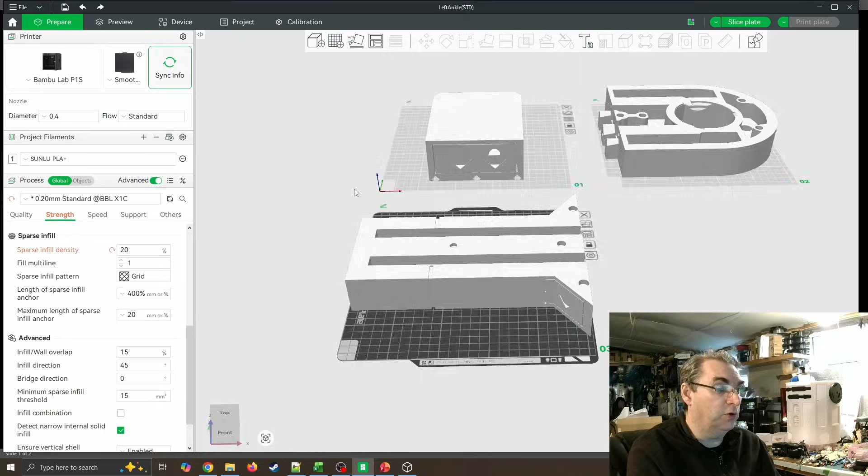Quick important reminder, there's no need for supports with any of this stuff. If you do click supports, it will put supports down the entire length of these holes, and that's where the metal rods are going to go. So again, no supports needed. It's already got integrated supports like here, which we cut out, and you'll see that in a moment.

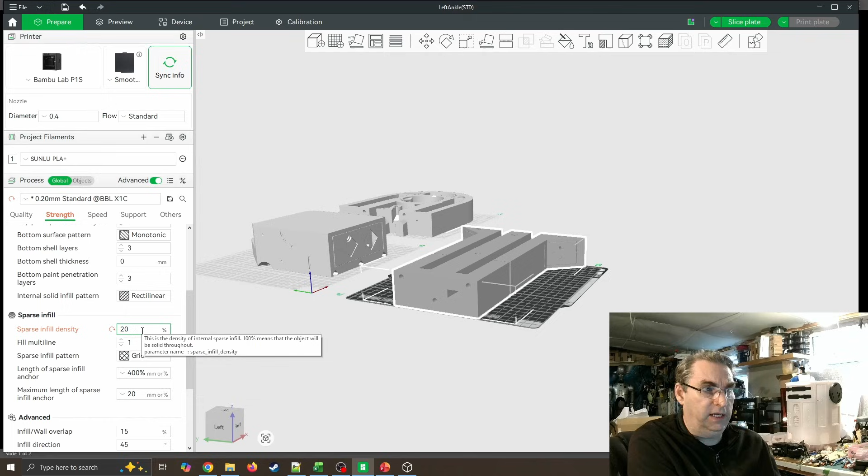Okay, quick word on quality and strength. I've used 4 walls and 20% infill. Again, time will tell if these settings are all right. Hopefully in about a month's time we'll be driving it around at conventions, so we'll know whether it was strong enough. I've already printed these, so let's go back a few days to see me actually assembling one of the legs.

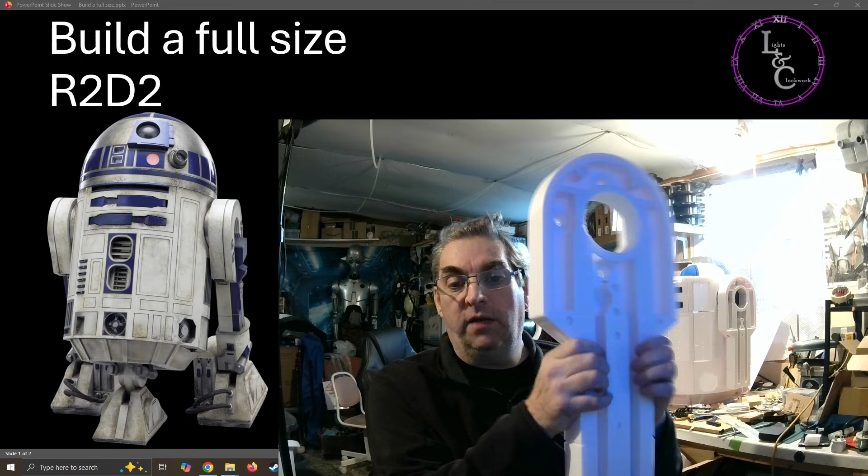Hello, it's December 26th. I'm going to spend a few minutes and try to get a bit of work done on the legs. So I've already made a bit of a mistake - I've trial fitted the legs and now I can't get them apart to actually apply the glue. So I shall worry about that in a little while.

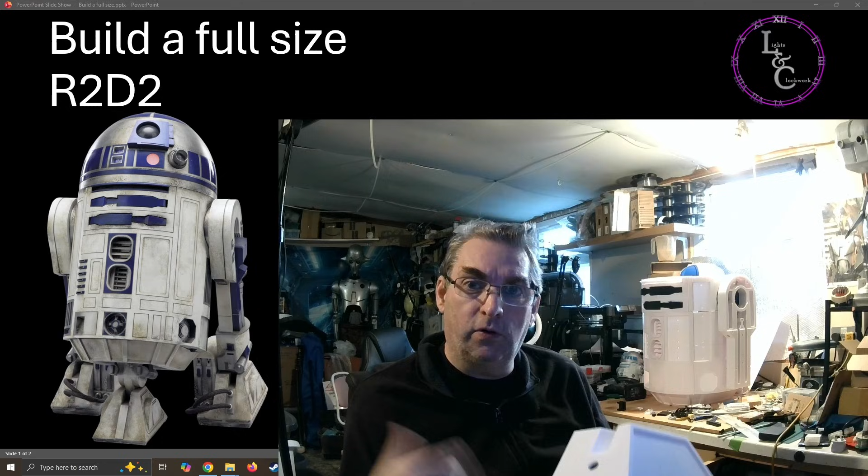Over the past few days I have been printing the foot shells, so I've got both left and right sides done now, and I think most of the fixtures and fittings for the ankles are done too - centre, left and right. But my next task is you need 6 pieces of 6mm threaded rod.

So I've already got some metre-long pieces that I've got in stock from a previous project. I've already marked them off with a bit of masking tape. Now the right thing to do now would be to get a vise and a hacksaw, but I'm not going to do that. I'm going to use an angle grinder because it's a little bit quicker, but it's easier on the arm. Plus I've got no new blades. I've got my goggles on standby because it can be quite dangerous. So I'm going to cut these together and then we'll try to start sliding these legs together.

Okay, so that's these cut down. I'm glad I was wearing the goggles because I definitely felt some of the sparks hit me in the face. So one thing I do when I've angle ground a bolt down is put a quick test nut on and just make sure that it does actually come on and off.

If not, it's time to get the tap and die set out and recut the thread, or get a file and just take the edge off a little bit. But that one seems fine. So one down, a few more to go. Okay, so this one didn't quite work very well, so I just take a file to it, file down the edge a little bit, and now it's gone on just fine.

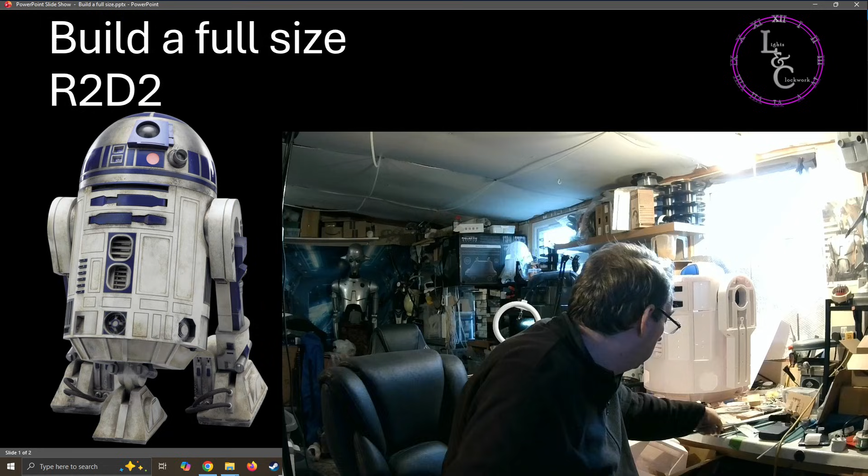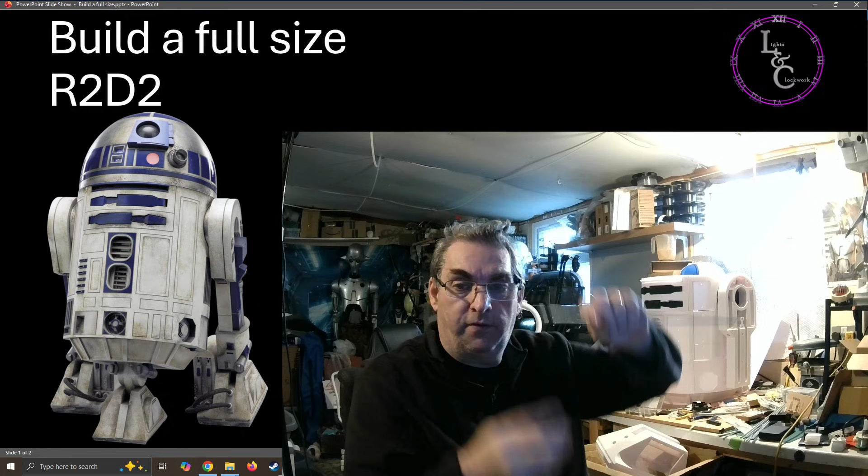There we go, so that's all of them now done, ready for threaded nuts in the legs. Okay, so we'll try and take these apart.

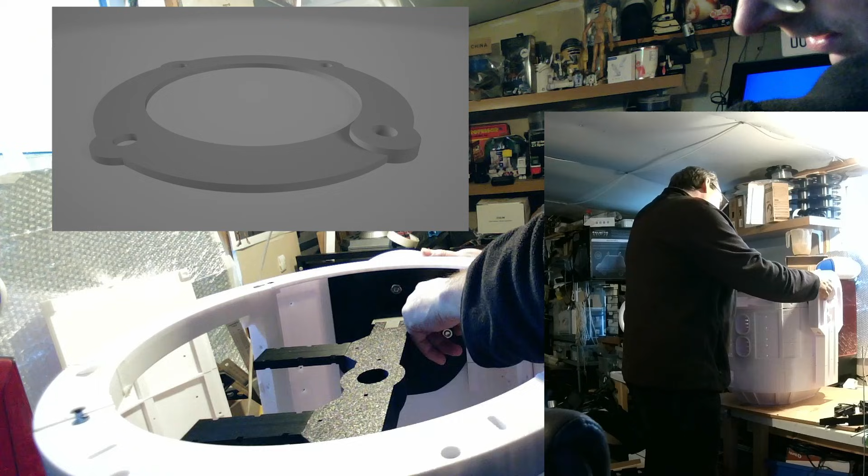Okay, so if you're wondering how the manual method works on this one - because I did the manual method on the Mark III - this is a slightly different mechanism, but it's quite straightforward. I've been playing about with it. So you've got the 4 bolts, although I've only got 3 on right now, and all you've got to do is loosen them off a little bit, and then there's a slightly reinforced, slightly inset bit, you can just pop that out. Oops.

Not really, so undo it a bit more. Just undo that a bit more. This comes out very slightly, so it comes out a little bit. Then you can just sort of move that down, so you can kind of see it. That then pushes back in. Tighten your nuts up, and your leg's now in the position it should be for the 3-legged mode.

To come back, same thing again. Just loosen them off a little bit. Put that back out, comes back up, clicks back in. Tighten it back up, and you're in 2-legged mode. Obviously do that on each side, but it should be, and hopefully fairly straightforward and strong.

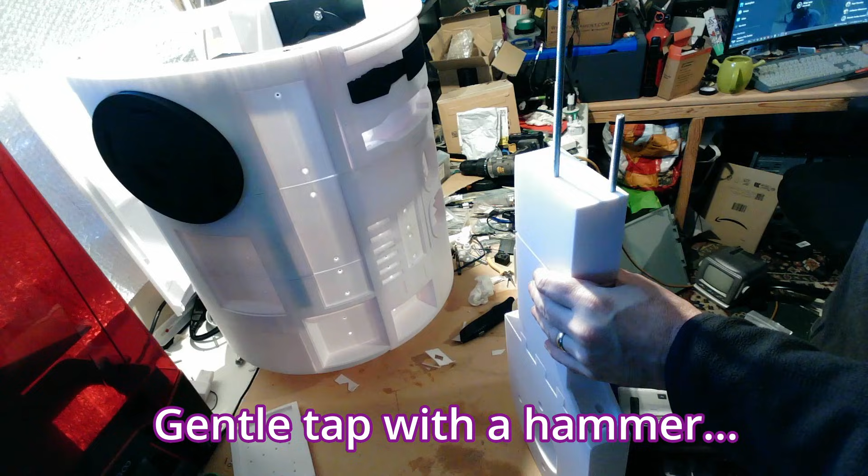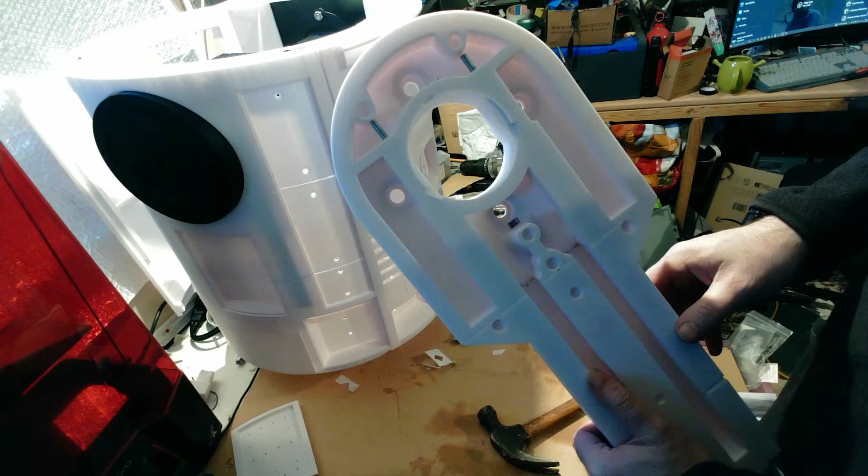Okay, so the 3 bolts are now in. I've had to tap them through a little bit, but it should be strong enough.

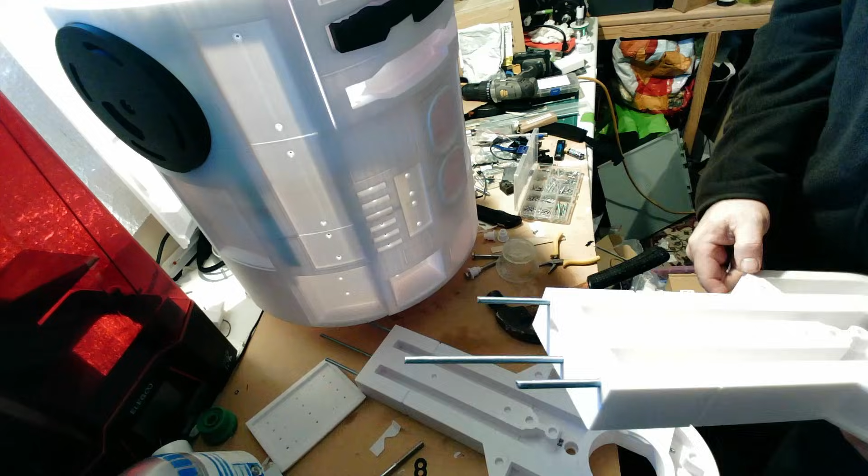Okay, with a bit of brute force, got the threaded bolts in. Whether they'll come back out or not, I don't know. You're supposed to take 2 out to put into the ankles, but I'm going to leave them set for now, and I shall come back to that in a little while.

Okay, so that's the legs now. Got the metal bars in, all the glue's all set. I've got the ankle, more on that in a little while.

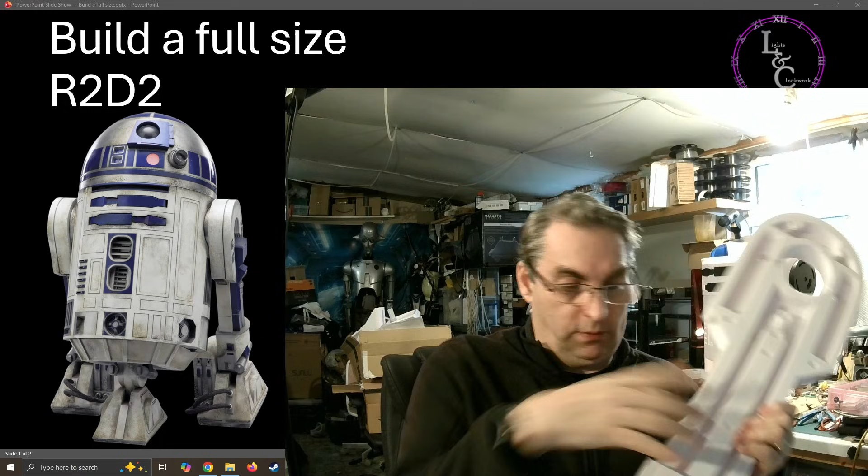You can at this point just do a test fit if you're feeling brave. There we go, that's now in. You should glue the ankle in, but I'm not going to for a while because I do want to spray paint all this and attach some of the other greeblers and things. But I'm fairly confident the threaded rod will be strong enough for just some test runs around the house.

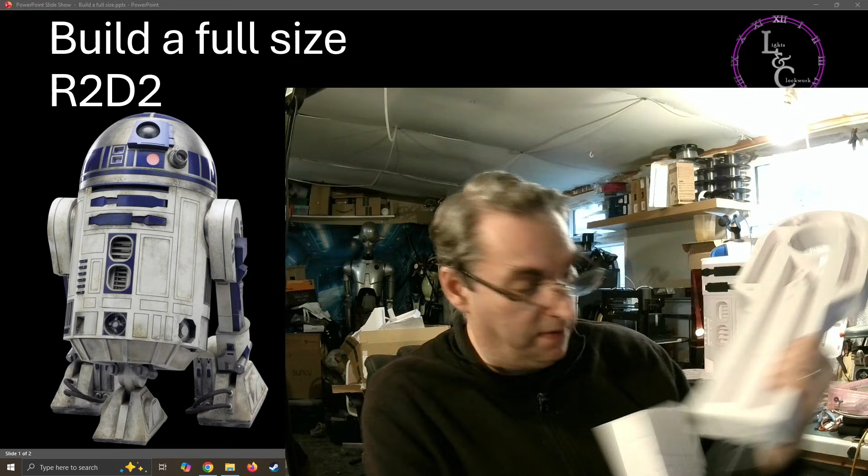Now it does require 2 square nuts to go into this side. So in a moment I'm going to take the bars back out, put the 2 outer ones in, fasten them into the square nuts, and then the centre bar, again that's just going to slide out. You put a square nut in this side, this bit, for that to attach in. So the centre bar is attached at the top end, and the 2 outer ones are attached in the lower part of the ankle. And then some more nuts go on the top to hold it all in place.

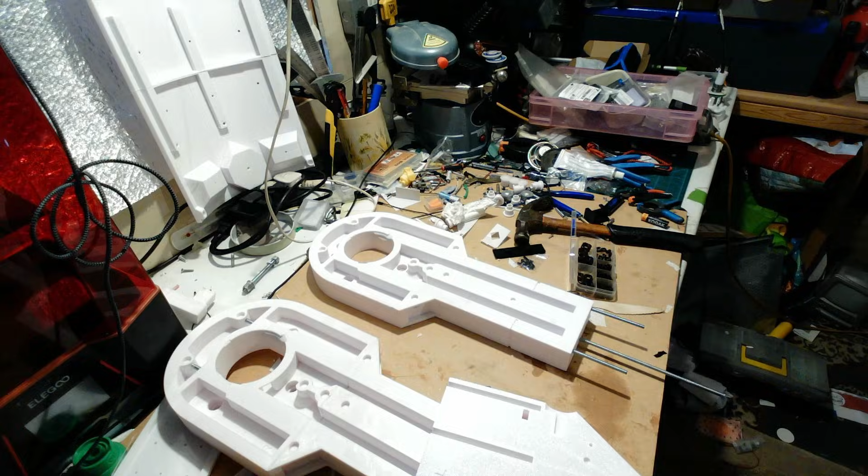Okay, so I'm on the left leg. It says so, it's got the L's on it. I'm just going to take out these 2 bars, just going to slide them in. You can see this sort of go all the way through. What I'm going to do is just put a square nut in. The square nut drops down, and then wind them in.

I'm just tightening enough so I can just see enough at the top so I can put the top nut on. I think that should be alright.

Okay, so now the second side.

Okay, so I'm basically just winding it back so I can just see enough thread at the top to know I can get a nut on. Okay, the same with the top side. So again, I can put a square nut inside it.

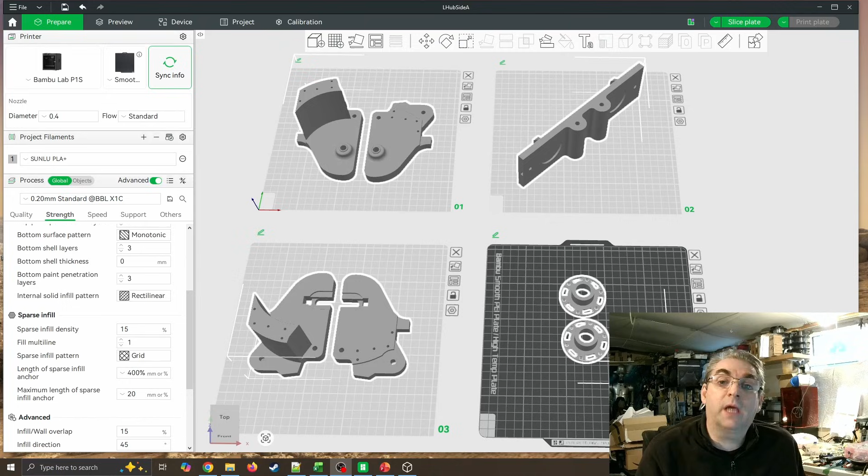Okay, so it's now time to move over to the hub drives. Nothing fancy or difficult about these, simply put them on the beds and press print. Again, I've gone with the same as the legs: 4 outer walls, 15% infill. I've printed them as they've loaded in, so no rotation, no supports. I've cloned this because you need 2 of these - they're just for the bearings to go around the Omni wheels.

This is by far the simplest of the gearbox mechanisms that I've ever made for a Michael Baddeley's droid. These are much simpler because they're relying now on the hub motors.

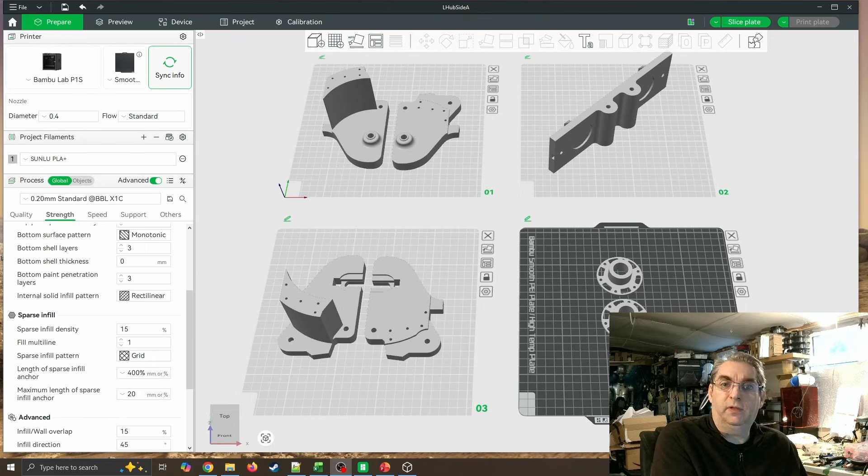Okay, so now I've already made one of them up because I wanted to see how it went together without the stress of having the camera pointing at me. And I'm glad I did - there were a couple of little issues, but not with the design, with my choice of bolts. I'll take you through that as we go along.

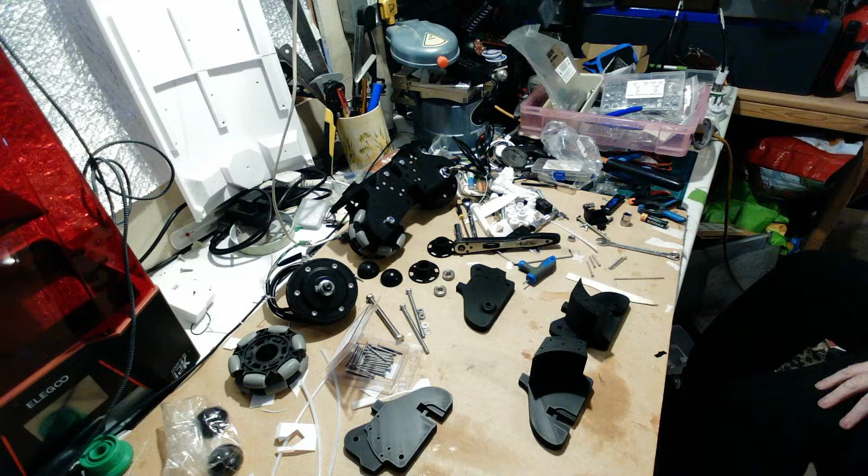Okay, so I've got everything lined up - the back plates, the top plates, the bearings, the Omni wheel inserts, the nuts and bolts, the Sorbothane I think it's pronounced, and the various nuts and bolts that I think I need.

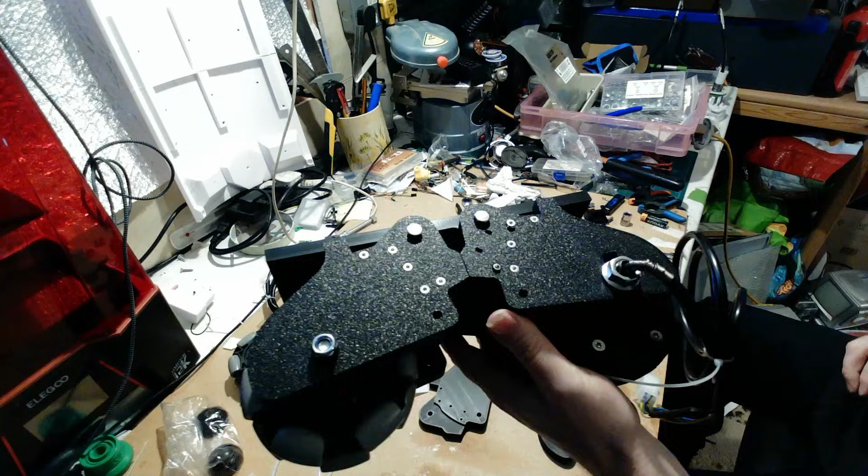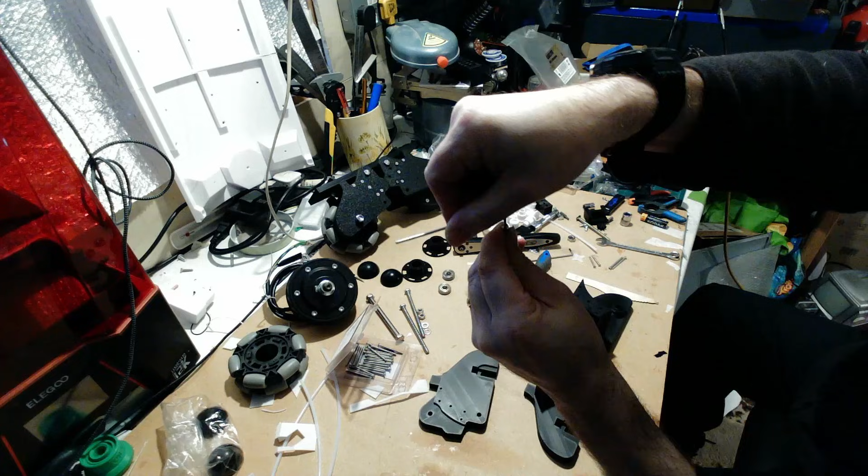Okay, before I go any further, I did have a little problem, which you can see. I'll probably do a close-up photo where I've not been able to get this countersunk bolt all the way through, and I can't get it out either. I left this one slightly proud, which has a slightly different head. Basically, I bought a bunch of the 40mm length countersunk bolts, which I think you can see. Unfortunately, when I put the Allen key in, it's physically rounding them off, and that's what's happened with that one - it's rounded off, and now it's stuck in or out.

So if it fouls the skin, I'll just take a Dremel and saw it off, because the other option was reprinting it. So what I had to do for the others is use a much stronger head, a slightly better one that's proud of it, to actually cut the thread and then take it back out and put the next one in. Now Michael talks about using an electric screwdriver for this, but unfortunately I don't have the right attachment, so it's just going to be tediously using my tools, and it's going to take probably about half an hour.

So yesterday I did this sort of sat while watching a movie.

Okay, so let's take the motor. Now I want the wiring to be on the inside, and we know the motor is going this way because the motor goes at the front. So that's how I know which side it goes.

So I'm just going to undo and do the bolt. I mean, I could fasten this on without the motor, in fact it might be easier, but that's going to go in with a washer and that bit down, so it actually fits into that little slot, which locks it in.

So make sure we're locked in, so now I can just put the screw on. And that should then - is that the right way, or have I just messed that up already? No, that's fine, and I can do the same on the other side. Oops, oh I've got the cable tie snagged, so I'm just going to undo it.

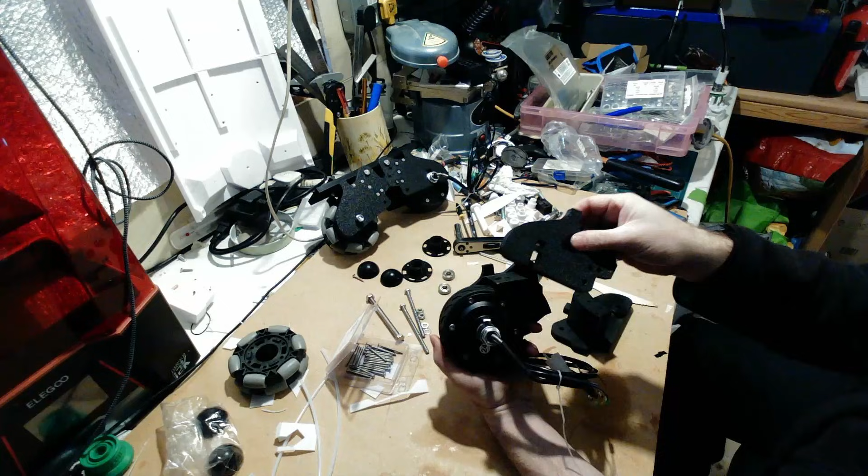I'm just putting that all the way on. Again, I'm just making sure that the little notch is coming in, and then I can just tighten that down a bit again. So I just want to make sure everything lines up. It's not quite - not sure why, what's going on there. No, that's fine, that's fine.

Okay, so the tedious task now, but again the joy of movies means I will fast forward all this section. The thing is with this design is you can just undo these and drop the whole motor out anyway, so it shouldn't be a big deal. Certainly a lot easier than building a full gearbox.

Okay, so I'm going to take the one with a slightly larger Allen key head, or hex drive, whatever you want to call it, and then slowly wind the whole thing up. Oops, it's pushing it away, so I'm just going to take that back out. Try again, I think I just missed.

Okay, so that's the first one in, but like I said, this is a button head, so it's actually slightly proud of the surface. I think it'll be fine because of the way that bolt is, but I'm now going to just leave that one in place while I do the others.

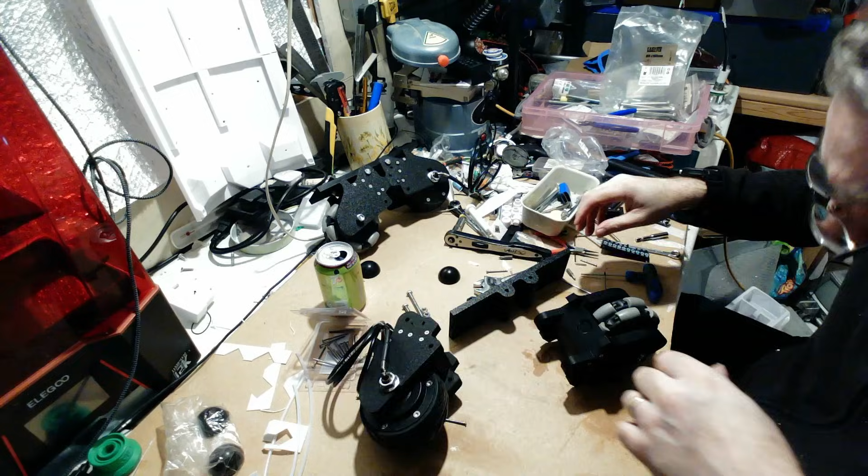So now let's fasten this all together. Again, noticing this is F, as in front, R for right hand side. We know the wheels go towards the front, so I'm just going to slide the bolt through. Oops, that's what I was checking the other one for. This is actually solid at the moment, so I'm just going to punch a hole through that. So I'm just making sure the bolt sort of goes through. Seems to be fine.

Again, I'm just double checking the markers, making sure I've not messed it up. There we go. So I'm just checking down the hole, checking for the alignment. There we go, and we are... not quite again. There we go, we are now in with the recess.